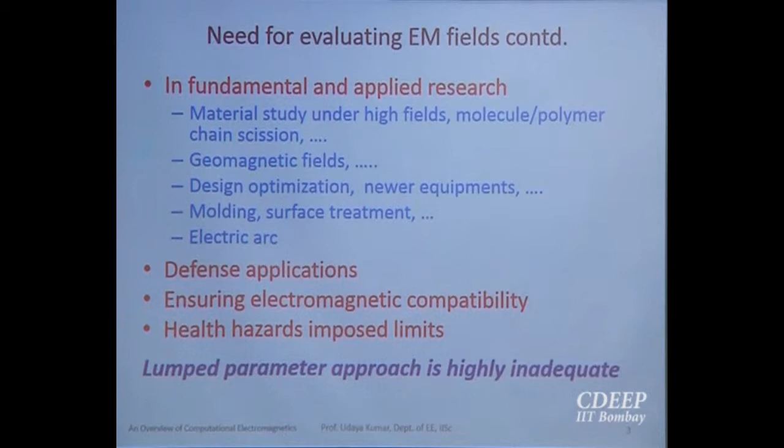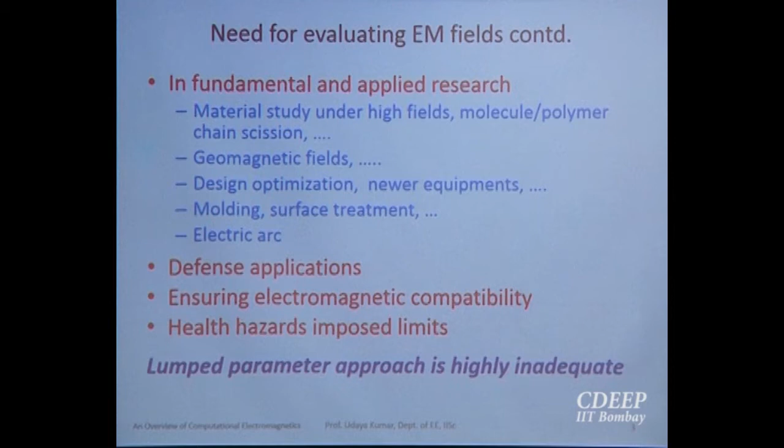Then all of a sudden we had a new paradigm called electromagnetic compatibility. So too many electromagnetic devices used in an environment started talking to each other, like students talking in class, not listening to the lecture. So suddenly people realized it's not permissible. We need to ensure all equipment are electromagnetically compatible. Neither should they produce intolerable noise, nor should they be susceptible to it. So this new paradigm is very important even for classical electrical engineering.

Initially it was thought to be a subject for high frequency people, but not really so. Now everybody has to worry about this. Then everybody has become health conscious.

They are very conscious about their health, even though they don't do regular exercise. They eat junk food, but when it comes to application, they say no transmission line should pass through my house. No antenna either. Everybody wants to use mobile phones, but they don't want an antenna nearby. That's true, but the thing is, health hazard is not that severe, but sometimes highly magnified because people think that's a very fascinating field. But we do need to worry about this.

All this application was there earlier also, before the advent of new computers. However, people were very wise then. They knew how to make good approximations. They knew how to use available techniques, lumped equivalent circuits, and so on and so forth. So intelligence was dominating over the method for quantification. So they survived. We survived with the lumped parameter approach.

However, now everything has to become very smart, very light, very efficient, so on and so forth. So we need to do a high degree of quantification. Otherwise, machines were there, radar was there well before the advent of digital computers. Anyway, coming back now, it's also not required because we are going to numerical methods. I thought I should just pass through these remarks.

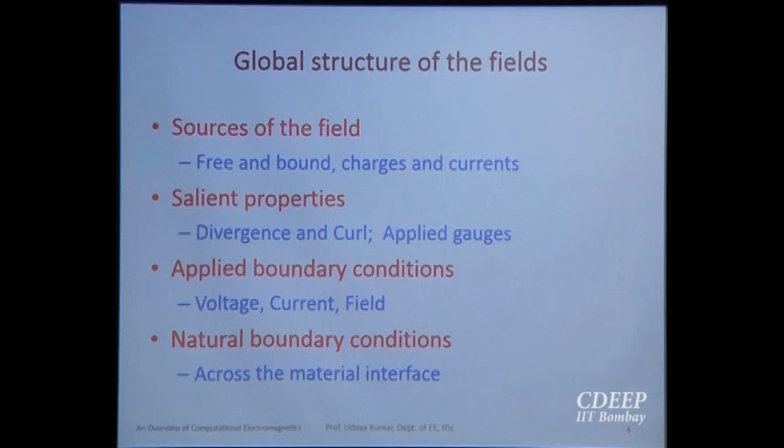These form the structure. Then comes the main point: because we are going to numerical methods, sometimes we try to tune it that way. Fields generally invade the space in and around, theoretically up to infinite extension. Basically, they are spatio-temporal functions. They are functions of x, y, z, or any other coordinate system you choose to analyze.

Then sometimes they are also functions of time. As a result, any function, by classical definition of function theory, has a domain and a range, both of which have infinite number of points. The domain has infinite points, and so does the range. For example, if field exists below a transmission line, in the x, y, z plane, you have infinite number of points, and every point has its own field value. So you have infinite number of values in the range. As a result, copying from the mechanical paradigm, we say it has infinite degrees of freedom.

This is a problem: it has infinite degrees of freedom. We are unable to comprehend the field directly. In addition, we have some coupling within the field, because for electromagnetic quasi-static, low frequency cases, people are very happy—charge is governed by voltage, magnetic field by current, and unlike in the high frequency range, they are independent. If voltage is there, charge is there. They are seriously dependent on the current passing through the conductor. Then we have current dependent on the load, which is not dependent on the charge on the surface of the conductor. But then slowly, when you go to eddy current problems, magnetic field and electric field start talking to each other.

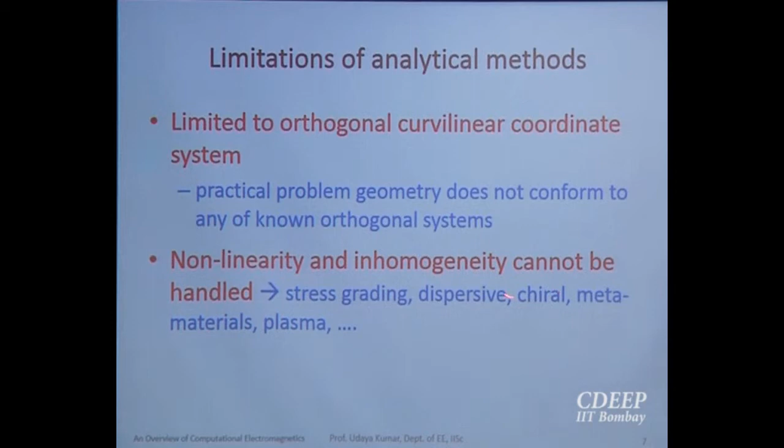We have movements involved, so one domain moves with respect to another domain, which is common in all rotating machines and actuators. Then coupling to thermal field, we have problems because we need to solve both equations simultaneously. Then we have flow problems, solar. This list is big, we'll stop at this point.

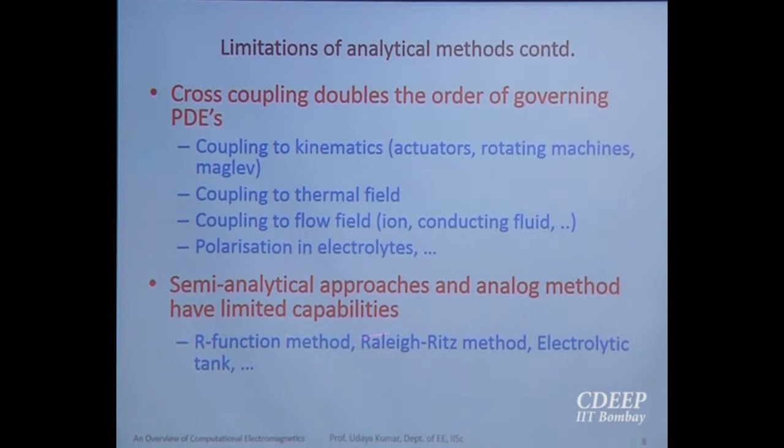So in other words, analytical methods are very attractive, very elegant, but have limited practical application. They are now limited to explaining simple cases in class, not beyond that. We have some semi-analytical methods, a first step towards numerical methods, but they also suffer from similar disadvantages.

Now comes the question: if we summarize, analytical method was very good and elegant, but has so many limitations. Then the question comes, why? How is it that numerical method becomes an attractive choice? What is so special about numerical methods that can tackle all these problems? So before praising the numerical method, first we'll look at the limitations, or the salient problems, in the numerical method.

Variables like geometry, parameters, material properties, and boundary conditions, which are available in parametric form in analytical solutions, do not appear in parametric form in the numerical method. One problem gives one number or set of numbers, not beyond. So any change in boundary condition, geometry, or materials requires us to redo the calculation again and again.

Then comes another important point: numerical solutions are generally not exact, except in some trivial examples. Many people raise their hand asking, if it's not exact, how can I use it? But exactness has little practical relevance. All our measurements, whether geometry, electrical parameters, or any other kind, have a tolerance or error. So exactness has no practical relevance; some tolerance is always there, so we have to live with that.

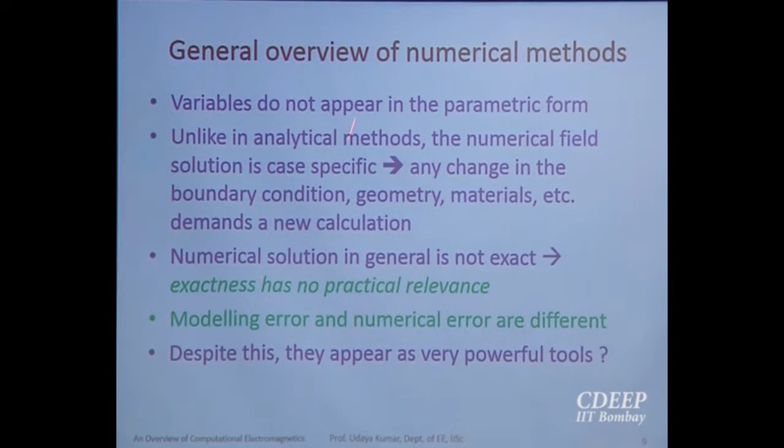Occasionally there is also an issue with error. Some errors are not numerical in nature; they are actually imbibed by correct, incorrect, or partially correct modeling. So modeling error and numerical error must be separated out. I'm using different colors to show that sometimes people club the modeling error with the numerical error, but it's not so. In spite of all these limitations, how is it that numerical methods are so powerful?

To illustrate that, we shall go into two well-known examples, an attempt to show that numerical methods are relatively easy to handle for day-to-day application. Let us consider a simple concentric cable, inner conductor, outer conductor, a highly simplified thing. Then these are color pictures of equipotentials, don't worry about them.

If you really see now, we know that the electric potential does not vary with Z. If you fix Z into the board, then theta does not vary either, so it's a function of only the R coordinate. So potential as a function of R is an analytical, continuous function, and therefore possesses infinite degrees of freedom.

Even though you know how to solve this, in general it has infinite degrees of freedom, which is difficult to solve. On the other hand, since we have an inability to imagine something abstract, we always want to imagine it in terms of known things. So we shall imagine a set of capacitors formed between the equipotentials. Of course, right now the equipotentials are known to me, otherwise you could do this approximation differently. So we have set up fictitious capacitors.

Now if you give this problem, most engineering students will definitely solve it, because they know how to solve these capacitors in series, whether they are equal or unequal is not a question; they have the methodology because they have been taught to solve it. What is the specialty of this problem? The number of unknowns is finite, because we have a finite number of nodes, and those voltages form the unknowns.

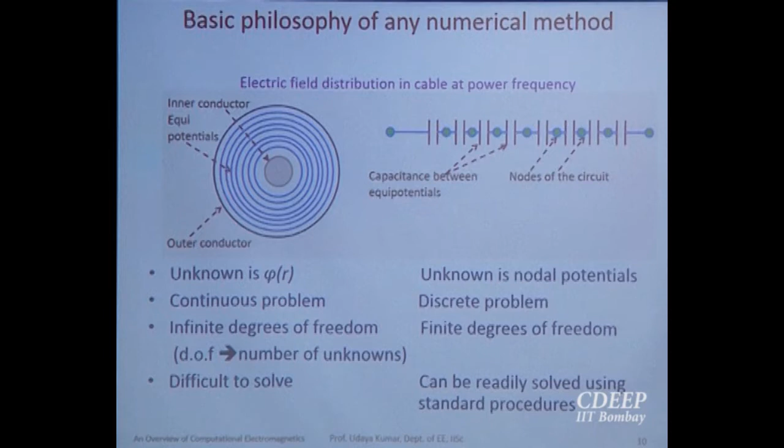So here we have a problem where the unknown is a function of space which has infinite degrees of freedom, whereas here we have an approximate problem where the number of unknowns is finite. This one we have been trying to solve, this one we are not so well versed in handling. So this is a difference: one kind of problem with infinite degrees of freedom, another with finite degrees of freedom, where we are more familiar. A second example of this kind, copied from a mechanical engineering book.

You have the famous hanging rope problem. A continuous rope takes a pattern of catenary, minimal potential energy under the constraint that the two ends are held at those two points. Instead of a continuous rope, you can have chain links, as used in survey, made of straight segments with a flexible joint with two degrees of freedom. The link can move around the joint. If you hang a chain of this kind, it also assumes more or less the same shape as the original rope. It's not exactly the shape of the rope, but almost the same.

Now comes the difference between these two problems. A continuous rope takes the shape of a catenary, which is a function of space - if we take this as x, it's a function of space. So because it's a function, it has an infinite number of unknowns, or infinite degrees of freedom. On the other hand, if you take the second problem, which closely resembles the first one, here the number of unknowns is finite.

How is that possible? If you know the position of these joints or links, we will have the solution everywhere, because once you know this position, between these two positions it's a straight line. So in the second problem, the actual number of unknowns is y1 to y6, finite in number, whereas in the original problem it is y of x, a continuous function. So see the difference now. Once again you can seek the minimal energy under the constraint to solve this shape. What I am trying to highlight with these two examples is that continuous problems we are not well versed in handling, whereas discrete problems with a finite number of unknowns, we are able to handle.

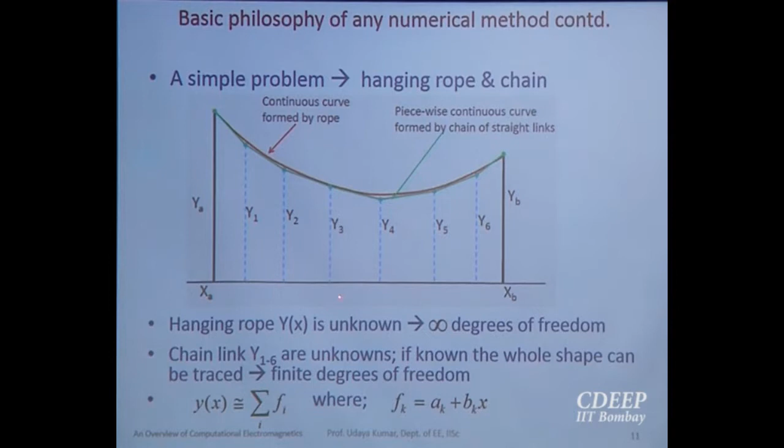So now comes the crux of all numerical methods. Field variables and their sources are continuous functions of space and time. Now we invoke a process called discretization, where an approximation is sought for a continuous problem, such that in the limiting case, when you increase the amount of discretization, this will tend to the original problem. There is some theorem to show that convergence does indeed hold. Discretization is the process where we make an attempt to approximate a continuous problem to a discrete problem in a consistent manner. All numerical methods invariably invoke this principle of discretization, as a result of which the number of unknowns becomes finite, and we are able to handle it using various techniques.

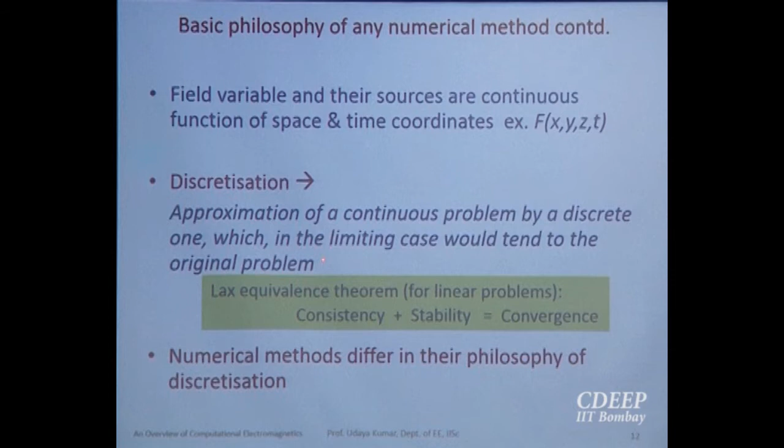Now coming to this concept of discretization, there are two main categories here: domain based methods and boundary based methods. In domain based methods, the governing equation is approximated, or an attempt is made to approximate the governing equation. We shall see them in some detail, not full detail. When trying to approximate the governing equation, what is its domain? It is defined over the whole of the problem domain, therefore your approximation is done over the whole of the problem domain. And remember, the governing equation actually applies to each and every point in the domain, therefore your approximation will be highly localized.

You can see later that such approximation is easy to code in a computer, because your approximation is localized, it's easy to handle nonlinearity and inhomogeneity. We shall see these two consequences later. This category has many methods: finite difference, finite element, finite volume, and so on - we will name them later. On the other hand, people liking Coulomb's law, Ampere's law and other basic laws thought they should always deal with the source, because if you know the source, you know the field. That invoked the boundary based method.

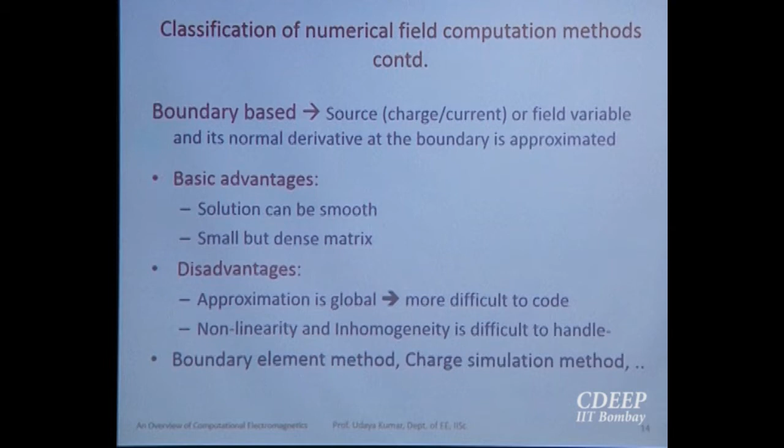Coulomb's law and Biot-Savart law are designed for a hypothetical case of single linear homogeneous isotropic media occupying the whole universe. This is not practical, so then they invoked polarization, equivalence of polarization with equivalent volume and surface sources, and then went into this boundary based method.

Basically the philosophy is very simple. The unknowns are the field as well as many times the source, because when you apply voltage, we know only the voltage, not the charge distribution of the conductor. So if you can somehow approximate the charge distribution, we will know the field.

Likewise, in the boundary based method, we try to make an approximation to the unknown source distribution, whether charge or current. The advantage is that your approximation is limited to the boundary, because we have source only at the boundary most of the times. So your solution will be smooth, because you are using basic sources that satisfy the governing equation almost exactly.

We will see some of these methods, but before going further, there are also disadvantages, because we are doing a global approximation, and if you have non-linearity and inhomogeneity, it will be difficult to tackle. We have boundary element method, charge simulation method, method of moments applied to integral equations, and so on. We shall see them there.

This applies to high frequency also, but being a low frequency person most of the times, I will highlight this example: people working with rotating machines wanted rotation to be imbibed. We had non-linearity on one side, because iron is non-linear, and at the same time we wanted rotation. Most of the times energy conversion occurs in the air gap, which in an induction motor is measured in fraction of mm, so when things move, it is difficult to discretize and handle.

They thought they should imbibe the good properties of domain based method as well as boundary based method, so they invoked a mixed method, where for non-linear iron they use the domain based method, and for the boundary they use the boundary based method, such that the air gap need not be discretized, so movement can be artificially plugged in.

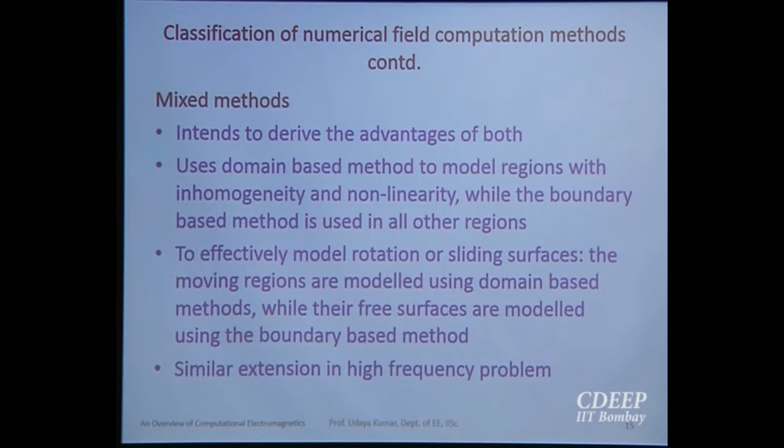But anyway, today's discussion is not important, I'll just skip this now.

Now we shall go a little more into the methodology. The goal is not to go into the details, because that will be covered mostly in other lectures, especially finite element which will be covered in subsequent lectures. Here the goal is only to give the general philosophy and superficial knowledge, and perhaps list out some advantages and disadvantages. At the same time, there are some methods hidden to insulation people that I also want to bring upfront, because they have similar principles of formulation.

So in non-wave propagation, we have static, electrostatic, magnetostatic and Eddy current problems. For people from the physical mathematics background, they may like to call this elliptic problem and parabolic problem, and there's no objection to that. We have several methods: finite difference method, finite element method, boundary element method, charge simulation method, finite volume method, and so on.

At least a few of them, because I had to cross them during my work, I will show some results. And the list is not complete, please note, because there are several things which are normally not used, several things which we never discuss in the engineering literature, but are available in the allied literature likewise.

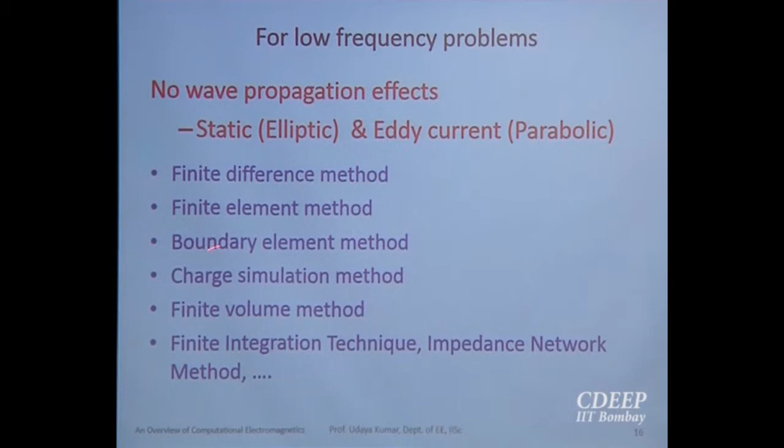Finite element method will be covered in a subsequent lecture, so I will not delve into that in detail, but I will make some highlights there. Boundary element method is a general paradigm. Sometimes all these methods, the charge simulation method and the method of moments, can also be combined here, so I will not highlight this method separately.

Then we have wave propagation problems. Most of the times when you say electromagnetics now, it is mostly meant that we are dealing with high frequency, but remember, low frequency also requires a lot of electromagnetism. Here you have the finite difference time domain method, a very elegant method, which is an extension of the finite difference scheme, but it has got physical insight to the curl operation. Then we have finite element method, because packages are available, they wanted to extend it to wave propagation problems, but it's not really that famous.

We have method of moments. Method of moments actually combines both the domain and boundary based method. However, invariably it is now quoted with the boundary based method.

Then you have partial element equivalent circuit method, PEEC, because people like circuit theory all the time. They wanted to represent everything in terms of circuit theory for two reasons. One is they like it and they can get some insight. Secondly, there are circuit solvers which can solve the matrix.

Then you have got more things, fast multipole expansion method, which can do far field approximation, near field approximation. You also have finite volume method. Incidentally, I did not go through it.

There's a PPT presentation from a professor from Aeronautics Department of IIT Bombay, which describes finite volume method for high frequency electromagnetics. I don't remember anything beyond this. It was there. I did not download, but I saw the name.

Anyway, then we have transmission line method, which is another kind of extension from the equivalent circuit method. Then I have so many other things like pseudo spectral time domain and multi-resolution time domain, and so forth. There are some methods borrowed from optics, which I have no real expertise or knowledge of.

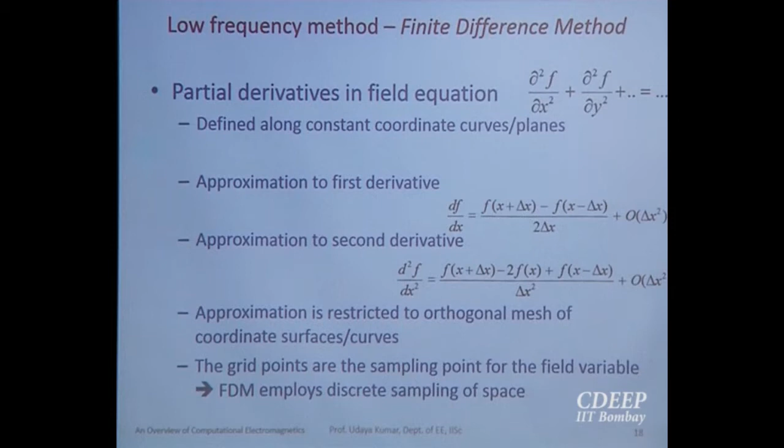In other words, you are trying to sample the continuous x by a discrete set of x values. As a result, when we do this operation on individual planes, you are trying to sample this 3-dimensional or 2-dimensional space by discrete samples. So FDM comes from this principle of discretization, where continuous space is sampled at a discrete number of points, resulting in an equation which is completely discrete in nature.

In the source free region, the potential at the center of a sphere is the average of the potential on the surface of the sphere. This is a consequence of the 1 by r dependency, 1 by r square dependency. So this is built in here in a discrete version.

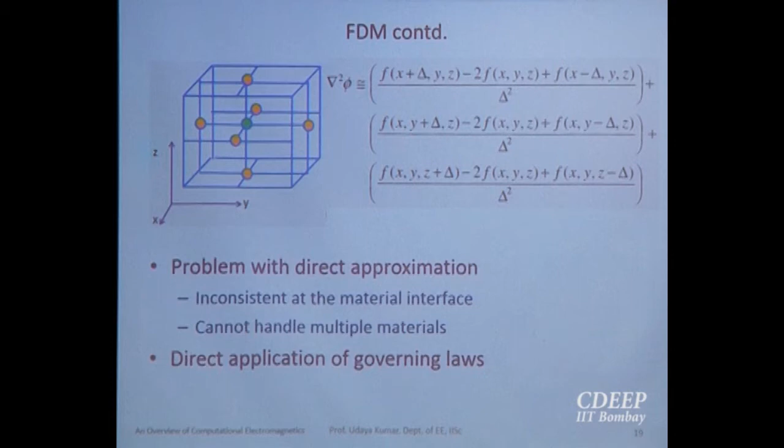So this is well known, especially for giving assignments to students because they can formulate it with ease. So this could be one of the first steps or first methods we can teach and what we can expect from students. However, let's not be taken away by this approximation, because occasionally, even in research papers, they make this mistake of inconsistent approximation.

The finite difference scheme in the classical approach cannot model an interface, because at the interface the field is discontinuous and your approximation is not valid. We will not go into details now, but if required we shall see later. So if you have only one material, you can proceed directly.

If you have multiple materials, you need to take care. Instead of doing this directly, we know that governing laws are the basis for the differential equation. In the Laplace electrostatic field, we imbibe two basic laws: one is conservativeness, one is Gauss law. Conservativeness can be directly satisfied by defining grid points, so therefore we need to impose Gauss law. If you have multiple materials, you can impose Gauss law and get a consistent form of the FDM equation.

There are some intricacies required to handle the boundary and all that. I think today's discussion may not be appropriate to go ahead with that.

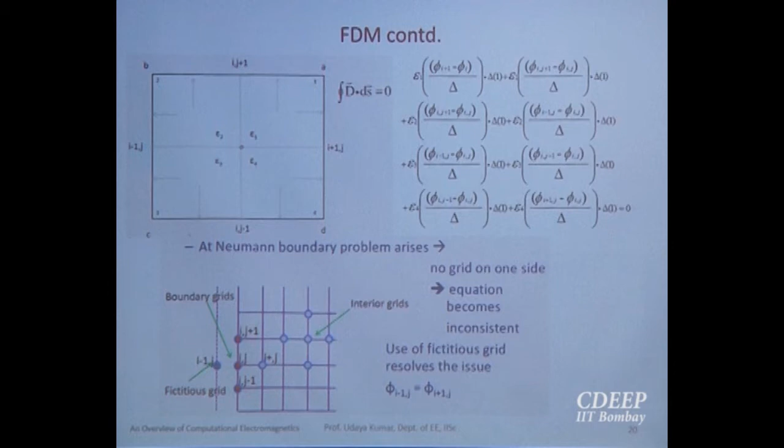Incidentally, there's another issue in some presentations made by people who use numerical methods. When you select a cylindrical coordinate system, the minimum value for R is 0. You cannot show results on the left side. Some people do it, which is very strange, because in a cylindrical coordinate system you either show the whole 3-dimensional picture or a 2-dimensional picture which starts from R equal to 0 only. You cannot go beyond it.

We have got cables now, especially HVDC cables. These cables have XLPE insulation because it's easy to extrude and has good dielectric properties. Unfortunately, DC insulation is a problematic case.

Many times, even in big organizations, DC is taken for granted. It's not really so, because in the case of DC insulation, after a few minutes to a few hours, the field will change from dielectric to conduction field.

During this process, there is a problem, because except for porcelain, glass and some well-known materials, polymers and many such materials have a nonlinearity property, where conductivity is a function of electric field as well as temperature. It's not a simple function, but an exponential function of temperature and electric field. So sigma becomes a function of field, and field is a function of space.

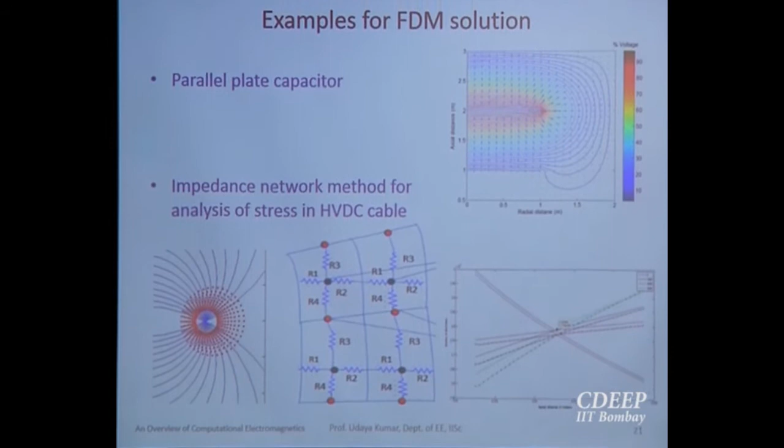Now we shall quickly summarize the advantages and disadvantages of FDM. It is very simple to code, in the sense that if you know how to write basic functions and organize variables, it is simple to code and easy to understand and evaluate error bounds. There is a lot of literature which gives you the error bounds, minimum amount of calculation, and to some extent non-linearity and inhomogeneity can be handled.

But the basic disadvantage comes with the orthogonal grid. We need an orthogonal grid to do direct FDM approximation. However, if you use the integral approximation, you may partly overcome this problem. But in the classical sense, yes, we need an orthogonal grid.

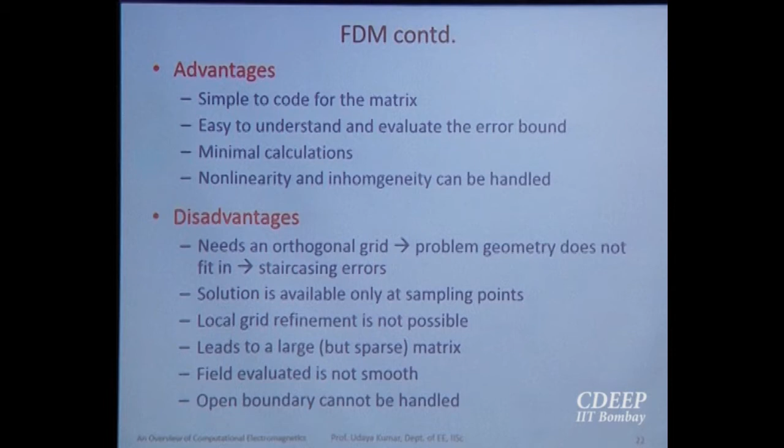And when a problem has a smooth boundary which does not conform with the coordinate system we have employed, we need staircasing. In other words, imagine a Cartesian grid where we are trying to model a concentric cable problem. Obviously, grid lines are straight and boundaries are curved, so you need to do a staircasing approximation. This is also a serious problem.

Then, the solution is available only at sampling points. This is one of the basic problems in FDM. The method does not tell you how to interpolate or extrapolate. You may do it on your own, but the method in principle does not speak about any of these things.

Then, local grid refinement is not possible, one of the biggest headaches here. It leads to a large matrix, but a very sparse one. Field evaluation is not smooth, especially in some applications where the field is important. This is a very critical point.

Then there's the open boundary issue. In electrostatics we don't have open boundary, we have only open geometry problems. However, in literature you see this terminology used, violating the mathematical principle, which is called open boundary. So we shall continue to use that terminology. Open boundary cannot be directly handled, so we have to bring in methodology from FEM to handle that.

So now, in the first section, we just went through FDM. Let's have a little more detail and summarize the advantages and disadvantages.

Now we shall go to the next one, a very famous friend of ours, the finite element method, again borrowed from our civil and structural friends. Here the philosophy is slightly more elegant than the finite difference scheme. I will not go through details, but some points need to be highlighted because most of the industry uses FEM rather than any other methodology. Even though there are commercial packages, engineering design involves electrical, thermal, and mechanical aspects, so it is a common platform for all three disciplines, therefore FEM is still the leader in this domain.

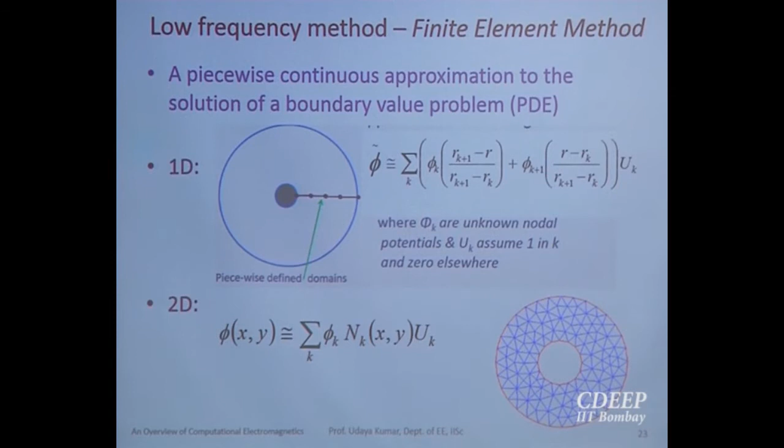So likewise, if this approximation is carried out, this is only an introduction, not the detail. So what is the thing now? Because you have made an approximation to the unknown function, which is called the potential here, the original differential equation cannot be employed. The original differential equation is a Laplace equation, in this case, or Poisson's equation, which requires the second derivative to be definable. That means the first derivative must be continuous, otherwise we cannot define the second derivative. So because we made an approximation, the PDE cannot be employed as we can have lots of discontinuities.

So then people said we get a weak solution. However, we project to a domain whose dimensions are much lower than the original dimension. So in the weak solution, we get the solution, however it may not satisfy all the differentiability and continuity requirements. So here we have two distinct approaches.

A very elegant approach, in my opinion, is variational calculus. We will not discuss that, but it's a very beautiful one, developed along with differential calculus by the same set of people, Newton and others. But we have lost touch with this because it's slightly more difficult to understand, as we've never had training in it. However, if somebody is interested in learning, you know that the distance between two points is a straight line, but can you prove that using your differential calculus?

Distance between two points, you know. I'm not talking geodesics, I'm talking about a plane surface. It's a straight line, everybody knows, we can show it geometrically, but can you prove it using differential calculus? Such formulations are straightforward in variational calculus.

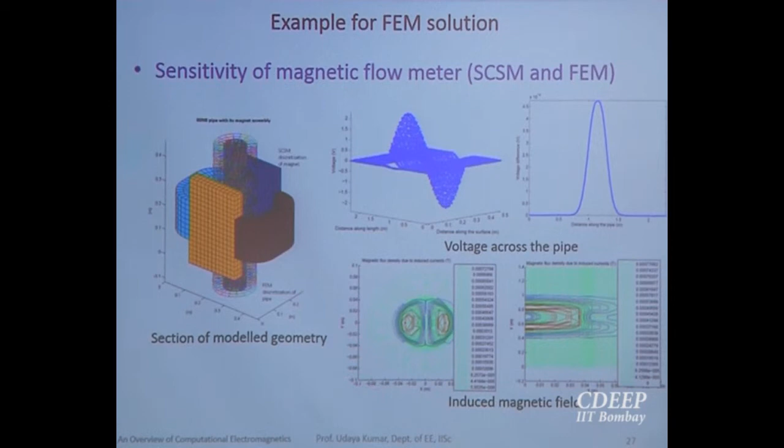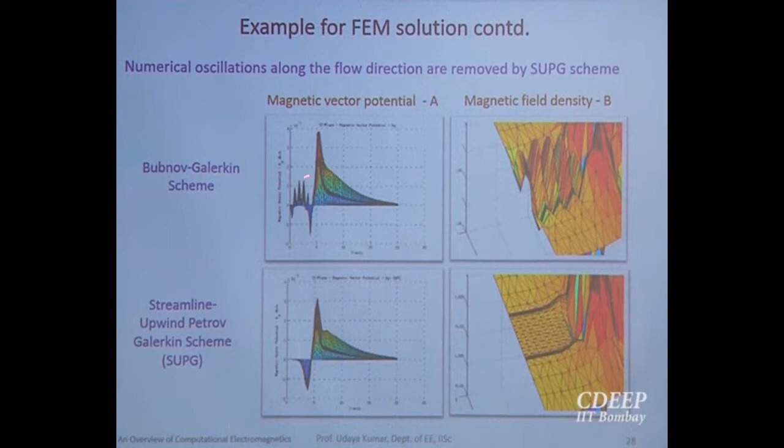And as I told you, flow rate is nominal. For the present flow rate employed in India, this is sufficient. In case you go for a huge production, a huge reactor, then we will have a large magnetic Reynolds number, in which this Galerkin scheme can lead to oscillatory solution, for which streamline upwinding scheme can remove the oscillation. Those details are not essential today.

Now we'll go to the next one. Summarizing, finite element method is still a dominant method because it is used in our allied branches, civil and mechanical. Engineering design involves a combination of all the three disciplines, so therefore finite element method will still dominate the industry in most of the application.

It has been developed to such an extent that it can handle even the open geometry problems or open boundary problems. Earlier ballooning technique was employed, now we have a special element called infinite elements to model the open geometry. Then it also has different forms in the form of meshless formulation, so on and so forth. So in other words, FEM is one of the important numerical methods for electrical engineering.

So next method will be the finite volume method, which is not that famous in electrical engineering. Some people take it to be the extension of finite difference scheme. Basically, it is not something new. What is done here is basic conservation laws are directly applied.

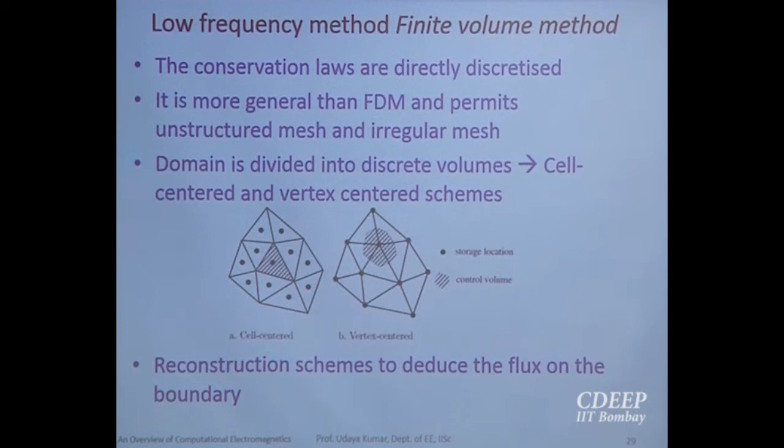For example, in a discretization scheme like this, you need to employ Gauss law or the divergence law directly. So that gives you the formulation. I'll not go to the details, but this is an interesting methodology because it's easy to understand, easy to formulate, and sometimes not always easy to code.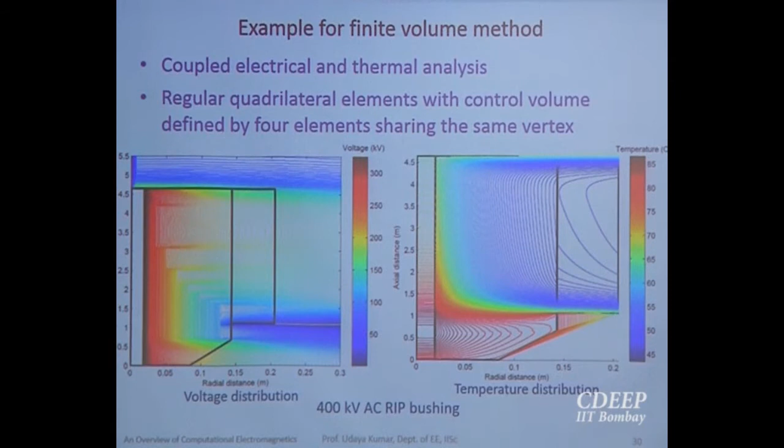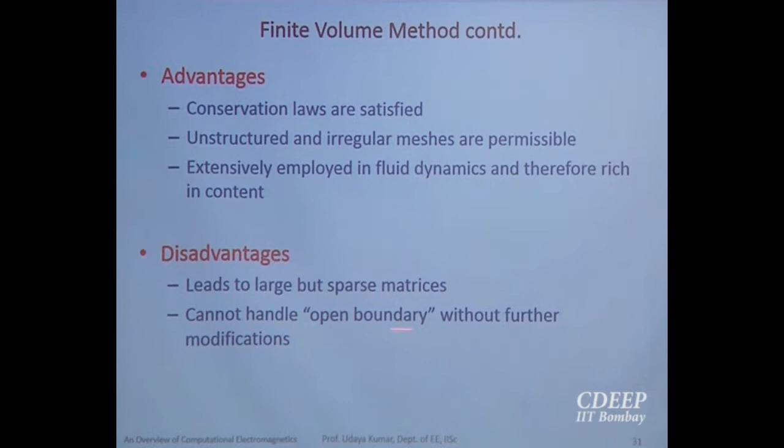Now I think I have listed out the advantages and disadvantages, but basically because it is a domain based method, it is not designed to handle open boundary. We need to do some further modification. It leads to large and sparse matrices.

Now we'll go to some unconventional methodologies where actually method of moment is brought into classical insulation application. These applications are not readily seen by people working in magnetics because they are not that useful in handling non-linear materials, but nevertheless they are useful in many senses. So I will quickly go through this because it can give the basis for method of moment for higher frequencies.

As we know, basically free and bound charges produce electrostatic field. Free and bound currents give rise to magnetostatic field. Here bound means that arising out of polarization of the material. Now there is a theorem in electrostatics as well as magnetostatics that the effect of polarization can be translated into effective surface and volume charges depending on the inhomogeneity.

And once you know that, we can apply Coulomb's law and evaluate. Basically, in the electrostatic problem, the charge distribution of the conductor is not known. If I make an approximation to the charge distribution, then I can evaluate the field in terms of the coefficient of the charge distribution. I will avoid the details here.

So now, unfortunately, like any method of moments, it involves complicated coordinate system transformation, numerical integration, handling singularity, because on the surface you are trying to evaluate the potential. Analytically, surface charge density has potential and electric field which is free of singularity. But when you do it numerically, because you are trying to approximate Riemann integration, singularity comes into picture. We need to do some circus for handling that.

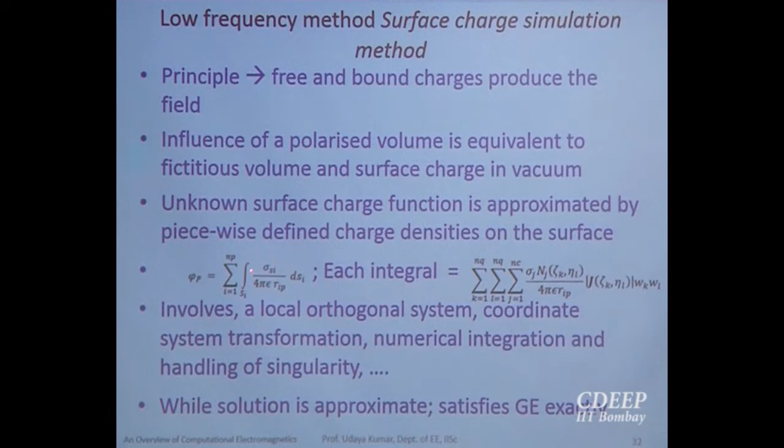But the advantage is you are trying to approximate for the unknown source, as a result of which your solution will satisfy the governing equation exactly.

This is a typical 400 kV corona ring. The interest was not the corona ring because these are readily available. What level of surface abrasion or protrusion can be tolerated so that in spite of presence of such protrusion, corona will not appear in the system. That was the aim of this study.

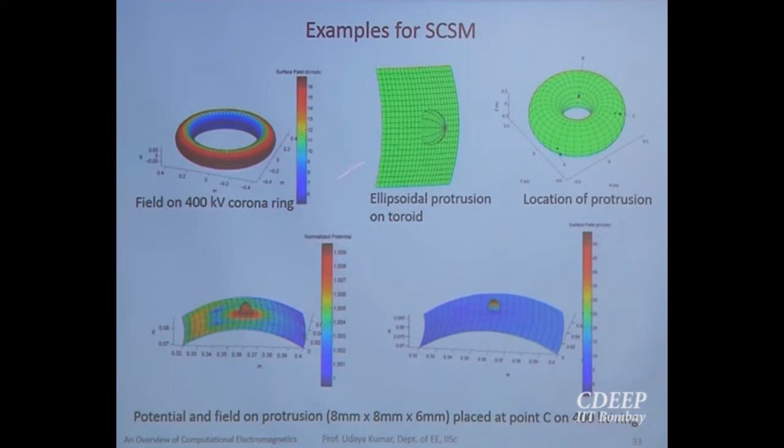So this was done, and micro and millimeter scale protrusions are invoked and the field was evaluated. This is one of the useful methods for electrostatics.

And the next, of course, this is another counterpart of the surface charge simulation method, where the potential distribution along the string insulator is evaluated. But I am coming to the magnetic problem.

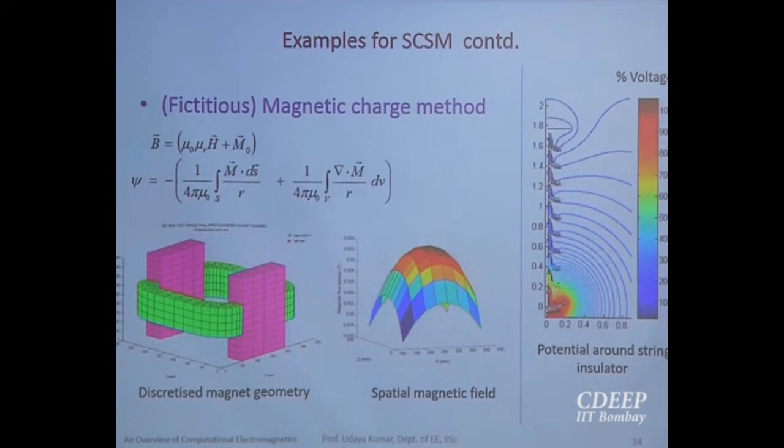Surface charge simulation method can be invoked in magnetostatics by invoking fictitious magnetic charges. So you have iron pole, and you have got permanent magnet, permanent magnet. These are the pole shoes made of soft iron, and invoking again the similar principle, we are able to compute the field. So these are something useful.

To handle non-linearity, we need to now invoke the volume charge, fictitious magnetic volume charge distribution.

Another example of surface charge simulation method comes from the grounding problem in Karnataka, maybe in other parts of South India, I don't know. Of course, availability of land for substation has become very difficult. Land is very expensive, many people don't want to have a substation next to their doorstep. Second thing is, now government gives you land which is not flat. Substation runs for 200-300 meters depending on the voltage level or more.

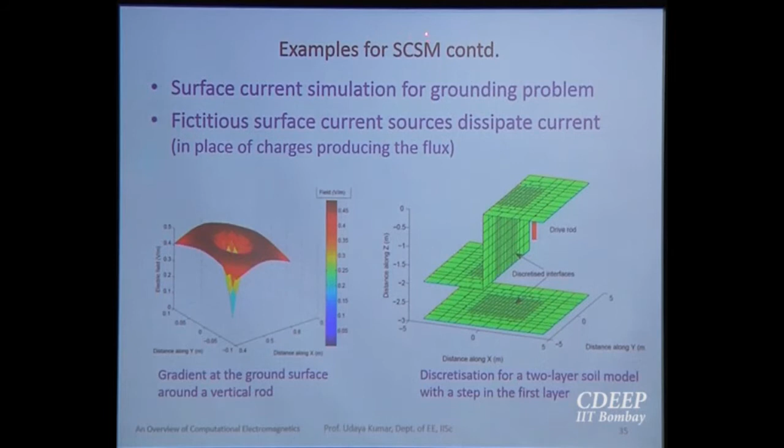In such cases, it has been found that working on the land to make it flat is very uneconomical for several reasons. So what they are doing is, each bay of substation is at a different ground level. In such cases, what will be the performance of the grounding system? So in the analysis, some code was written. Again, it uses surface current simulation method. The current is fictitious over there.

So this has got these advantages, and what I have listed here can be extended to higher frequencies also. What is the advantage of this method? It involves only boundary discretization. It can handle open boundary because the domain never comes into the discretization. It's very accurate, and small abrasion surfaces can be handled. Mesh refinement is possible.

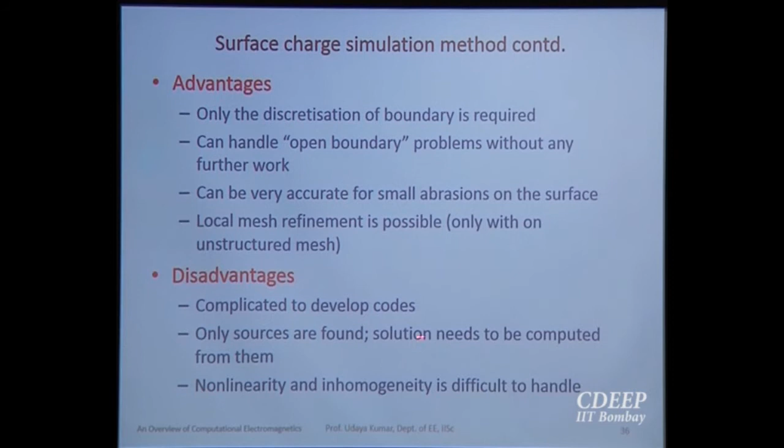However, it has got its own limitation that codes are difficult to write, especially if you are looking for micro irregularities. Then only sources are found. All the boundary based methods compute the source, so then the solution you have to compute on your own. Non-linearity and inhomogeneity is difficult to handle.

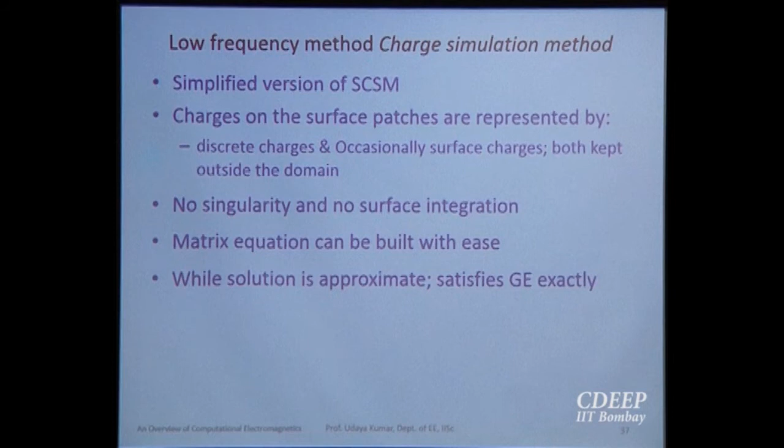We'll quickly go through an alternative of this because many people may not be interested. In the previous case, surface charges are approximated, but because of this we have a problem of doing surface integration and handling singularity. On the other hand, if I can combine all of these surface charges with discrete charges and keep them just inside the boundary, then we can overcome all the difficulties.

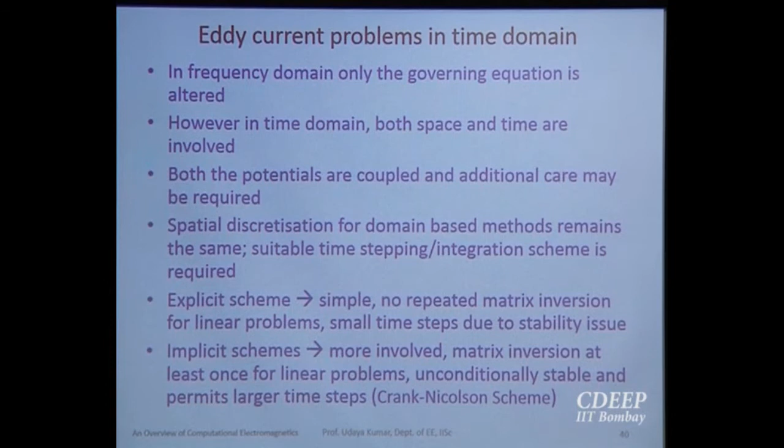Now, so those two are mostly static problems. In eddy current problems, I think we'll discuss in the next presentation. So what I thought was, we'll just go through only one slide on eddy current problems. In eddy current problems, we can have frequency domain or time domain, as you know. Only problem comes because time enters as a variable in the case of the time domain version. So then many of the methods can be employed there, where spatial discretization still remains the same. Only thing is suitable time discretization or time stepping is required.

Most of the time, this time stepping is done through either explicit or implicit schemes, where the explicit scheme has the beauty that every time updating can be done without matrix inversion, unless you have a non-linearity in the system. Whereas in the implicit scheme, there is no numerical instability; however, matrix inversion may be required at least once.

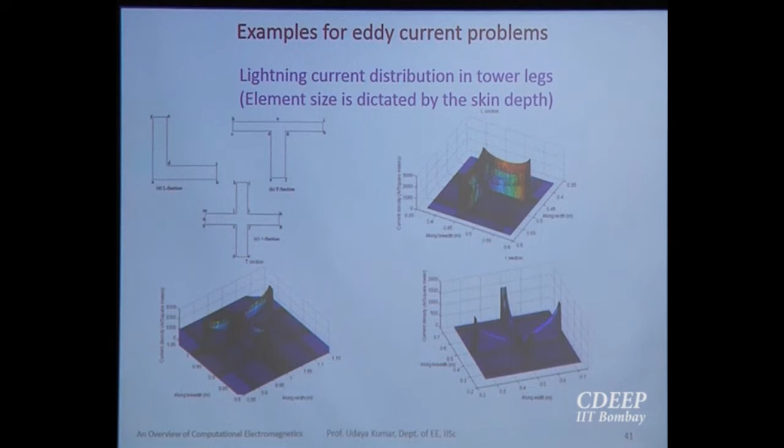This is an example looking into the current distribution through tower legs. Tower legs, you have L section, T section, plus section, depending on the cross section. So here the current distribution was computed using the in-house eddy current solution.

We shall summarize the low frequency methods before going to high frequency methods. There are several well-known methods. Selection of method must be based on the properties of the problem, whether it is an open geometry problem, whether it has inhomogeneity, whether it has non-linearity.

On the other hand, what is your target? Are you talking about the total energy, force, capacitance, inductance, or are you looking at a maximum field, peak loss density in a certain region? Depending on that, you can choose the method if you have a choice.

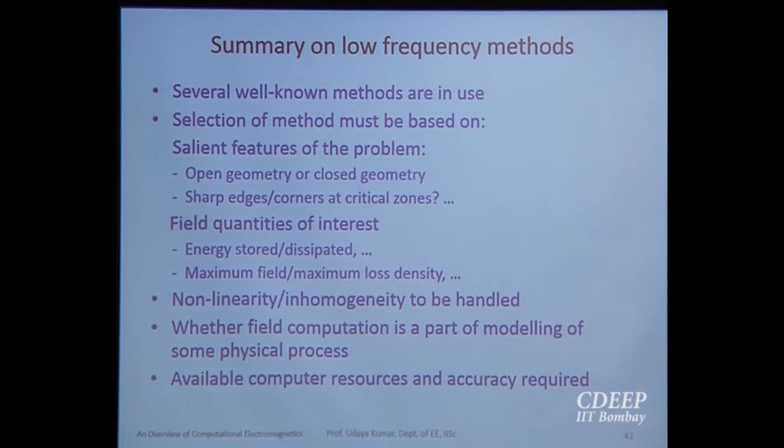Then, of course, it's important to check whether field computation is part of a physical modeling process, because field computation may be a main step in the design process. On the other hand, if you're doing research, it may be part of a model which involves modeling a physical process, so then we need to do the things repeatedly. Those issues must be discussed or analyzed before taking it to a problem.

Applications of frequency methods are very vivid, we know that. We'll skip this because of time. We'll go to high frequency methods and dwell into one or two high frequency methods before we conclude in this presentation.

Now, in the case of high frequency methods, we have got a frequency domain approach and a time domain approach. Most of the time, it is a proprietary term of your ECE people, electronic communication people, rather than classical electrical people. However, electrical people sometimes have to deal with that because they have got strange phenomena. We will mention about that. Now, the question is, here you can formulate in terms of potential and field, modified potentials, and so on and so forth.

Now, most of the time, in the high frequency method, we invoke what's called method of moments. Actually, the Galerkin approach is also a method of moments, even though we don't call it by that name. So anyway, in method of moments employed for high frequency, we can do approximation using domain-based methods or boundary-based methods. But what is the speciality here now?

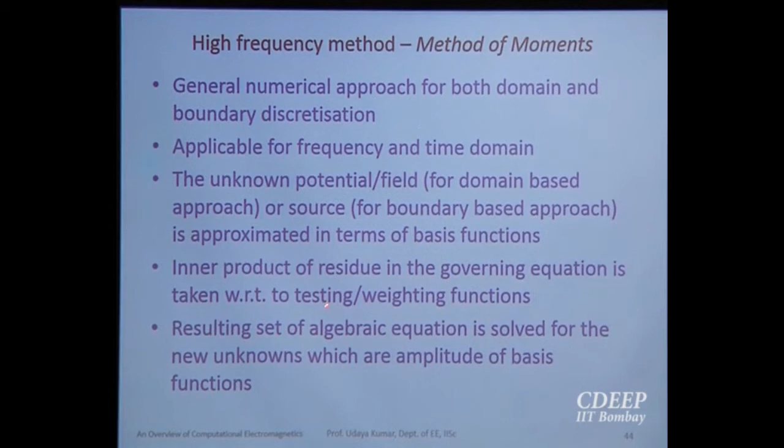I think this could be boring. I think I'll skip this, even though it's very interesting. I'll skip this and go to the next one, because too much abstract without any example would be difficult to follow.

Basically, what we do here is the following. In the case of method of moments, like your Galerkin finite element method, we do approximation. In this approximation, for the unknown source or unknown potential, we invoke what's called basis functions, and these basis functions define the order of the approximation. Then we use another function for sampling the residue or the error.

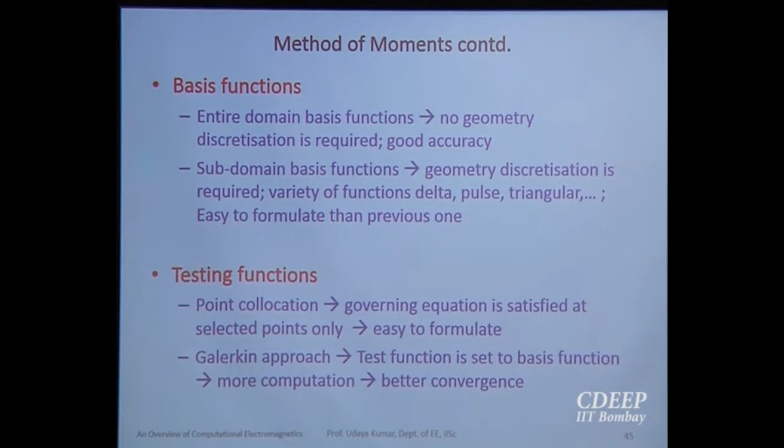I think I'll skip this also. Okay, we'll go to this example that may be slightly better off.

Let's look into the method of moments for thin wires. Thin wires are a bit famous in modeling because prior to surface modeling, thin wire modeling dominated evaluation of radar cross section, evaluation of interference, and so on and so forth.

Here the example is specifically for frequency domain because time domain versus frequency domain difference comes only with the time stepping. In all these problems, as I told, in high frequency a method of moments invariably means a boundary-based method. We invoke Green's function or the fundamental solution.

This is nothing special. We had point charge as a building block for electrostatic field. You have a dipole as a building block for the high frequency field. However, finding the fundamental solution of the Green's function for a particular problem can be a very cumbersome process because the problem is not having only one material - it has multiple conductors in and around. But other than that, this method goes through.

I'll avoid all these details. So what we try to do here is approximate the unknown current in the wire in terms of a simple pulse function or triangular function or a combination of polynomials, and then try to impose boundary conditions. Because once you make an approximation of the current, we can calculate the scattered field, but the field on the conductor inside the wire should vanish, or it should be equal to the impedance drop or resistive drop.

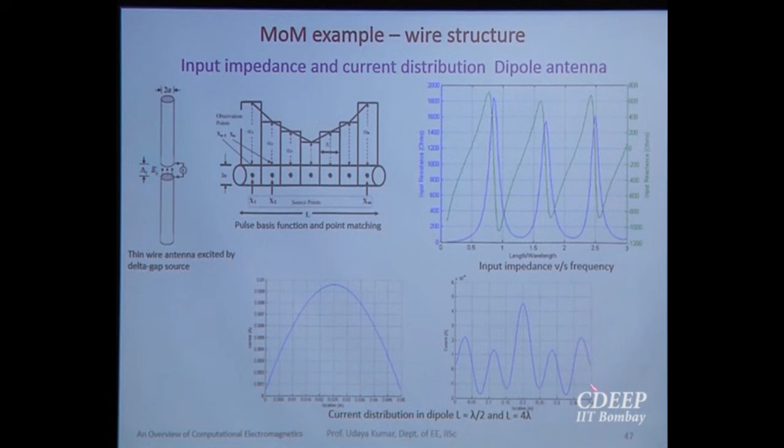So this is a quick example of an in-house code where the impedance of the dipole antenna is calculated. It involves very minimal steps. If you really want to try, it does not require any great mathematics. You can evaluate the impedance as well as current distribution.

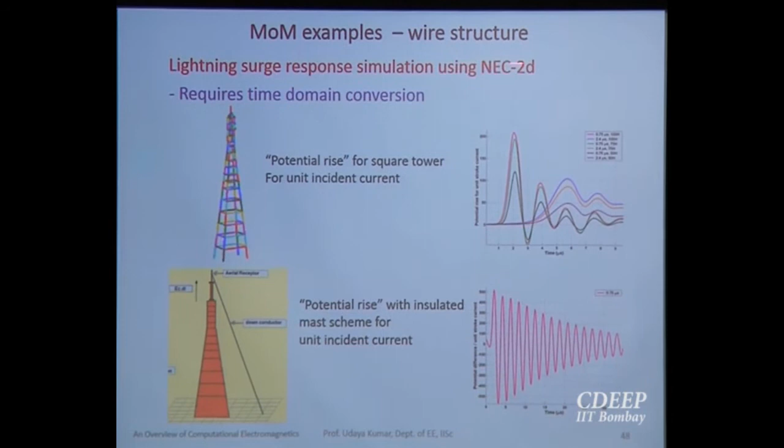Or else, if you are not ready to write code, you can use the numerical electromagnetics code which we employed for calculating the lightning surge response of the tower-like structure, insulated mast structure, and so on and so forth. Only problem in frequency domain to time domain is the conversion from frequency domain to time domain, which involves a lot of numerical problems.

We have a tower which launches an upward leader. All these events happen in a fraction of a millisecond. If we don't have the upward connecting leader, it is like a vertical monopole over a ground. So this strike to ground induces a current because it radiates electromagnetic field which links to the tower-like structure and causes a ringing within the tower.

On the other hand, if you have an upward leader, it is a non-linear electric arc which has a corona sheath surrounding it, spanning up to a few meters, which will dump in the charge, as a result of which the current changes from this form to this other form. So this was possible because the field computation was done in time domain using the thin wire code.

This principle is extended into conducting surfaces in the method of moments using most of the time what is called the RWG basis function - Rao and two other names I don't remember, obviously not Indian names anyway. This basis function is very famous, and it ensures continuity across the surface.

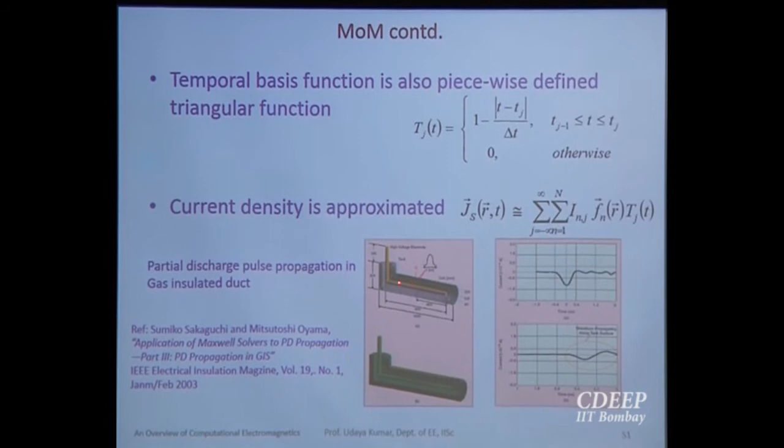Basic mode is TEM, then dielectric surface TE, and so on. Because this is a continuous duct where measurements are possible only at the couplers, some things are done in the electrical engineering also.

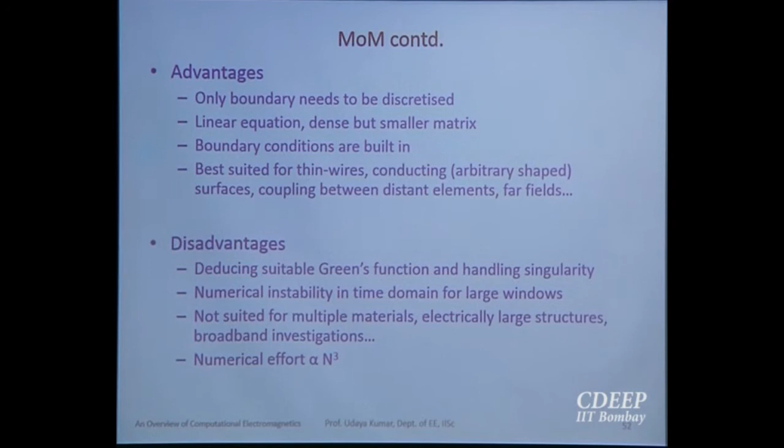I avoided all these things because I think that explanation would be boring. In the method of moments, basically we discretize the boundary.

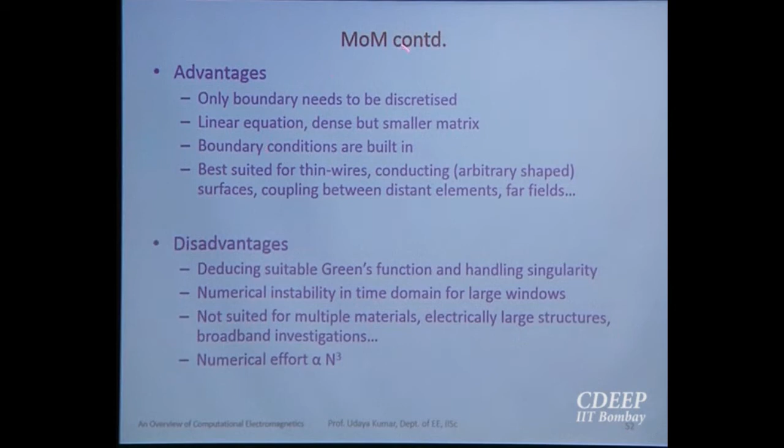We have a counterpart in electrostatics, magnetostatics, eddy current, and high frequency. But in high frequency, it is always mostly associated with the boundary discretization. The resulting equation is a simple algebraic equation, linear for linear material. It is a small matrix, very dense.

So in method of moments, because the boundary is discretized, boundary conditions most of the times are built in. This is best suited for linear systems. The disadvantage is that first of all, we need to have a Green's function.

We need to handle singularity, because the numerical version of the equation has a singularity. It's difficult to handle multiple materials, we need to do a lot of circuits. And numerical effort is proportional to the cube of the number of unknowns.

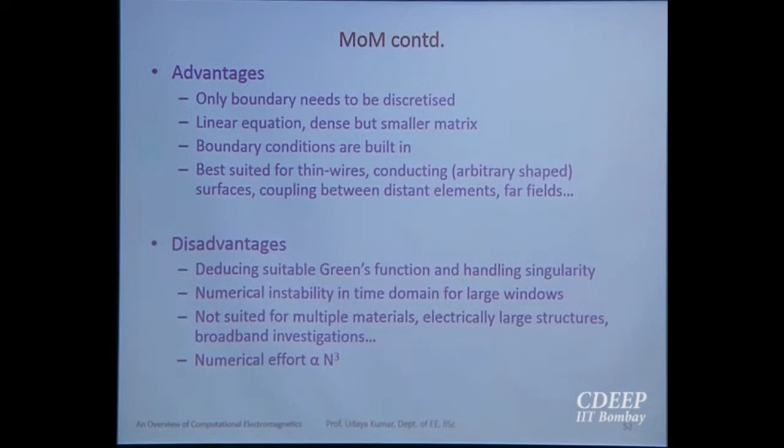We will quickly go through another one, the finite difference time domain method, because the previous method was difficult to understand. But this will be very straightforward to understand because it's a direct implication of curl laws both in space and time, called Yee's algorithm. Basically, we have coupled equations.

So instead of combining them, we'll handle them separately in this approach. This is an example in a Cartesian grid. You try to employ central difference for space and time using the leapfrog technique, for example.

If you see here, the magnetic field here is a result of the circulating electric field here. And because time is involved, this is leapfrogged in time by half a time step. In other words, the magnetic field at the center point, surrounded by 4 electrical sampling points, will be given by the components surrounding the curl of this electric field.

But please note, these are defined at time t, whereas the resulting magnetic field will have an increment of delta t by 2. This is, even though physically correct, a numerical forcing of propagation or time delay involved.

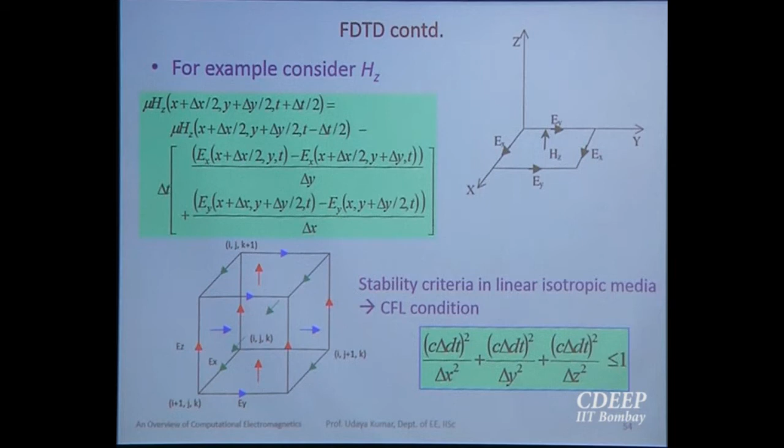This is very simple to understand and implement, with the Courant-Friedrichs-Lewy condition for stability. Because it's an explicit scheme, we cannot use large time steps, because the numerical domain of dependency should contain the domain of dependency of the differential equation. Otherwise, numerically it is an unstable system. So this has to be invoked.

So now why am I trying to advertise this method? Very simple to implement. However, we must not be taken away by the simplicity, because it can invoke numerical dispersion and anisotropy. This is very well known for people working with high frequency, because this dispersion is not from a physical phenomenon, it's from the numerical aspect because of discrete sampling.

So the remedy for this will be to have at least 10 cells per significant wavelength component. If you are working in the frequency domain, defining wavelength is not difficult. If you work in the time domain, you need to take a Fourier spectrum and decide which is your significant upper frequency, from which we can get the wavelength, and ensure that 10 cells are there for every significant wavelength.

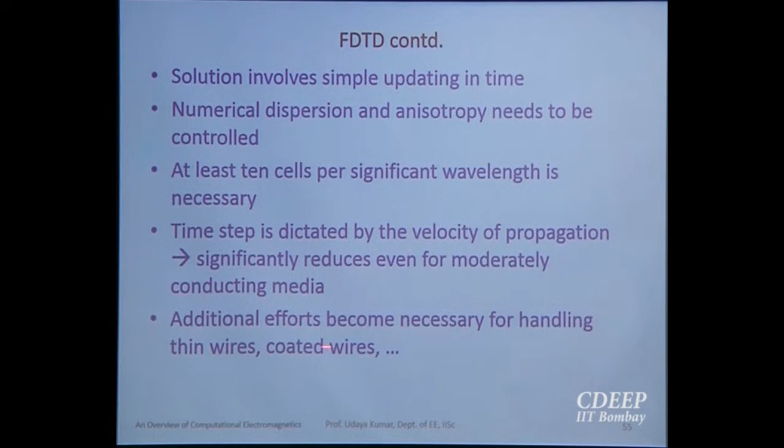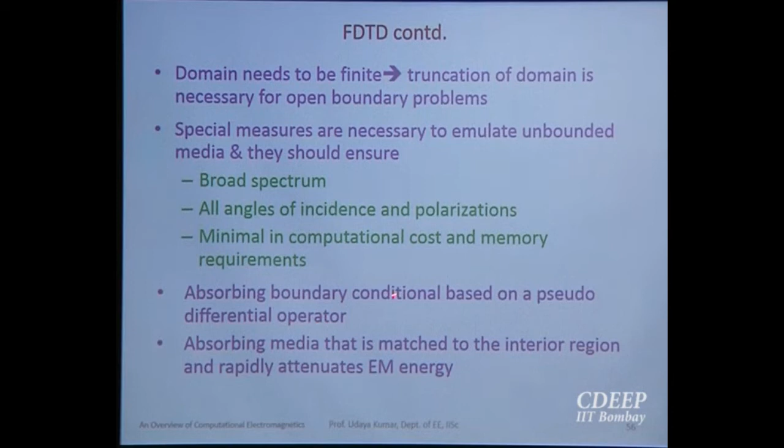And because it's a domain-based method, you have to discretize the whole domain. Because of this, when you have an open boundary problem, we need to truncate the domain because we cannot handle an infinite domain. So truncation can be done in several ways, by absorbing boundary conditions or higher order differential operators.

I will skip this also, and show a small example here. This is an old example of mine where, instead of talking about RCS or antenna power radiation, we have a channel, a lightning channel of 1 centimeter radius, 3 kilometers long.

Please note this is a very long one. So the whole space is discretized up to 9 kilometers. A perfectly matched layer is employed at the boundary, and our cell size will not permit handling a 1 centimeter radius conductor. Using a subcell or subgrid approach, it is possible to implement.

What is done is excitation is given. In most electrodynamics time domain calculations, you should avoid any signal which is rising fast. You should have a smooth rising signal.

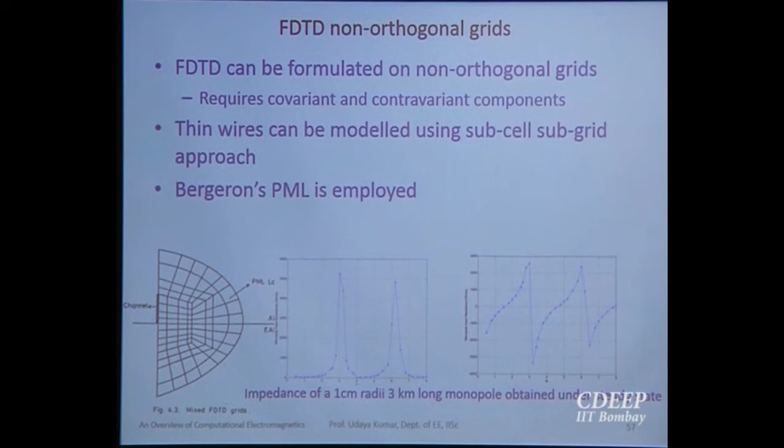So what I did was, using Gaussian rise sinusoidal excitation given at the ground end, wait up to steady state and compute the impedance for various frequencies. You can see theoretical and computed impedance match pretty well. So it shows the method is excellent. FDTD method can be very accurate.

Now to highlight the methodology, numerical effort is proportional to N, whereas an earlier method is N-squared. However, because the domain has to be discretized, N can be pretty large. When you have multiple materials, it's not a serious issue, but if the materials are not fitting into orthogonal planar interfaces, we have some problem. This method by itself is not suitable for far field approximation, or for interaction between two conducting or dielectric bodies separated by a large distance, nor for systems with high Q, and so on.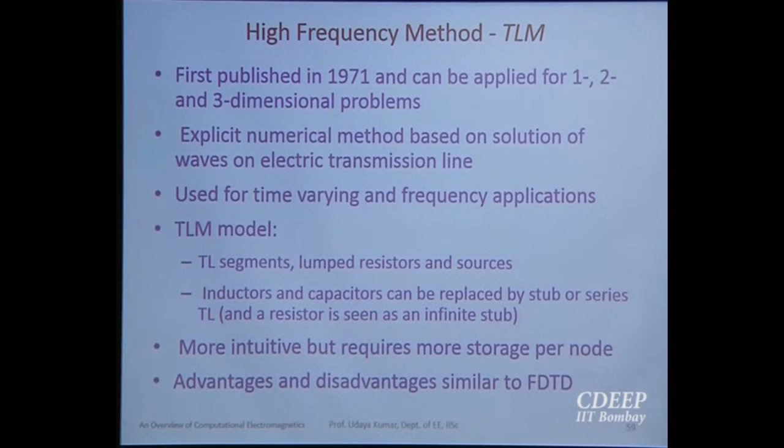In the high frequency method, there's one called the transmission line method. It is again a derivative of the impedance network method or partial element equivalent circuit method. This method basically imagines a skeleton of small transmission lines representing the original problem domain. So the field propagation in the original domain is now imagined in terms of signals propagating in the small transmission lines, which are interconnected. So it has a beauty that we can use a circuit solver for solving the field, provided we get the original matrix.

And there are two more issues. One is the finite element method. I think it will be covered in the second or third lecture today, so I will not deal with this one.

However, one thing I want to say is that compared to FDTD, compared to method of moments, FEM did not take over the high frequency domain. Even though commercial packages, because they have built-in routines, tend to propagate it, it's still not that famous because other methods have taken over for various reasons. But in principle, it is possible to use FEM, with the only modification required in time stepping - whether you want explicit or implicit time stepping. Advantages would be it can handle multiple materials and arbitrary shapes, whereas the disadvantage is the whole domain has to be discretized and we need to do a truncation of the boundary.

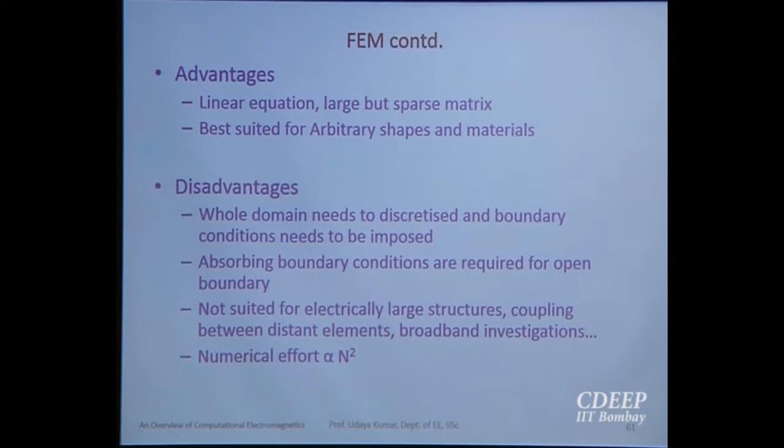Other issues are there. Now we'll quickly summarize our observations on high frequency methods. There are well established methods, so selection of method is again based on the salient feature of the problem, and whether we have non-linearity, inhomogeneity, or special materials like metamaterials present. Then you have to look into your methodology, and also into the computer resources available.

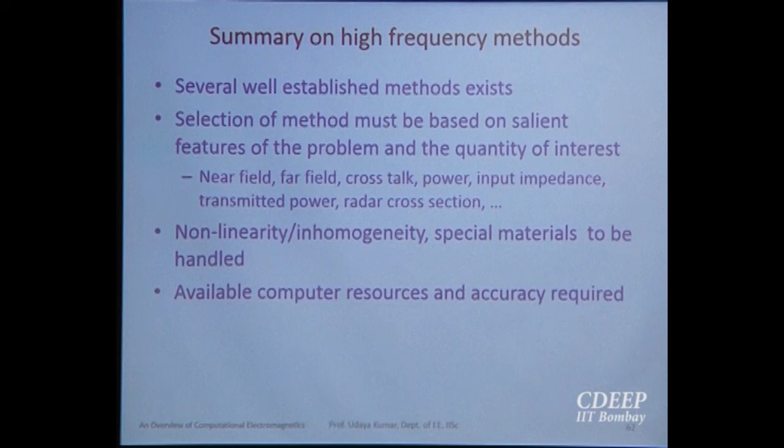Because if you remember, the reason for evolution of faster computers was not because of computer science people, it was because of the computational people - mechanical, civil and electrical people who demanded it. So computer people thought they should go to higher hardware. Now unnecessary entertainment and multimedia has demanded higher computation, storing of data and transfer of data has demanded higher computation. Otherwise, the advancement in computer science is basically because of the computational people.

In spite of that, now people are having problems with computer resources, especially when you want to calculate the radar cross section of a stealth aircraft, or even an ordinary aircraft. We have difficulty because they define the problem in terms of wavelength - 10 lambda problem, 20 lambda problem. There's competition between Illinois University and one more company - we are the present world record holder for the most complex problem solved ever. Likewise it goes on. So in spite of all this advancement, you may land up in a situation where your computer resource is not adequate to handle the problem, so we have to be careful on that.

Application of the high frequency method was dealt with yesterday, so I think we'll skip this one now.

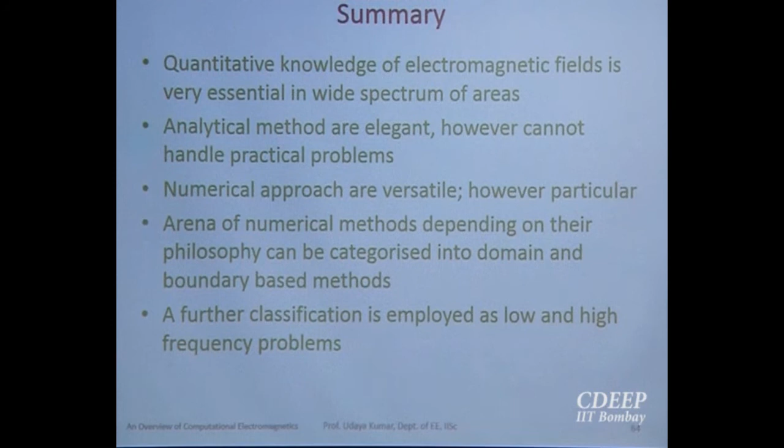So now I want to summarize some of the things and also comment, spend some time on this. Obviously we need to have quantitative knowledge on electromagnetic fields, otherwise we cannot do design, we cannot evaluate the health hazard, we cannot understand the physical forces involved. So there is a wide spectrum where I think everybody appreciates that.

Regarding analytical methods, they are very elegant, yes. However, they have limited capabilities built in, therefore we need to go for an alternative approach. Earlier we had analog methods where you try to simulate, scale the problem and do measurement. That's still a possibility, but scaling is possible only in certain classes of problems, and it is case specific, involving a lot of time, measurement error, and so on.

Therefore, the only way left to us was the numerical approach. But remember that it's only a particular solution for a particular dimension, particular material property, particular boundary condition.

Basic numerical methods can be categorized into domain-based methods and boundary-based methods. In the domain-based method, we try to approximate the governing equation. In the boundary-based method, we try to approximate the source itself and the polarization of the media.

Further classification is also possible, low frequency versus high frequency. Everything said and done, high frequency people, the EC counterparts, always have the pride that they are dealing with complex electrodynamics. It's not necessarily so. To give an example, if somebody wants to analyze the dielectric field, the first step would be to learn tensor analysis. Then I'm talking about electrostatics, because electrostatics is considered the least significant component of electrodynamics.

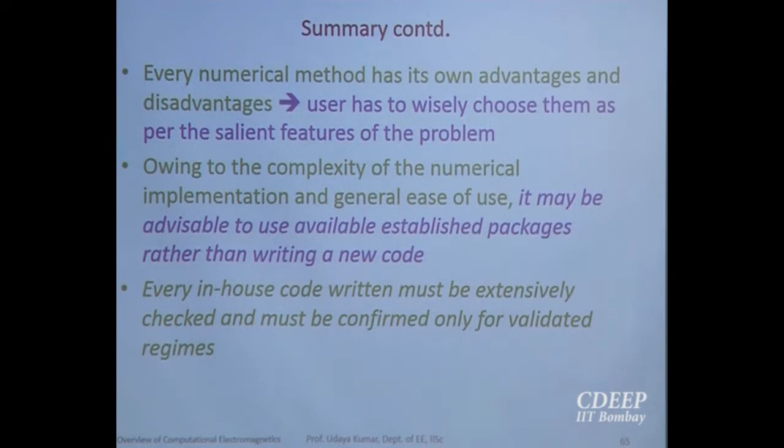Then this is one funny thing about packages. Because I advocated for packages, I should also caution here. For every input, the package will give a colorful output, but that doesn't mean the physical problem is actually modeled.

Then suddenly one senior person appeared at my door from a local college. He said, you mentioned that day that ANSYS has large capabilities. I tried modeling a point-plane geometry, and it doesn't give the right characteristics, it doesn't know how to model it. But the package cannot know anything, it is your responsibility to use the package properly. And point-plane geometry is a very trivial geometry to model in any package.

He doesn't know; many people confuse axial symmetry with axis symmetry. Another funny thing is that all these packages have beautiful GUIs, with interfaces and dropdowns for mechanical, electrical, and magnetic properties. The user assumes that, oh, it understood all the physical properties. But finally, when they select electrostatic analysis, whatever properties they entered in the mechanical and magnetic regime are never used further on, and they don't realize this. They think, I have given all the properties, so it must have understood.

This is one of the complications. Not to deviate, but once I had an interaction with a well-known company, which I have not mentioned.

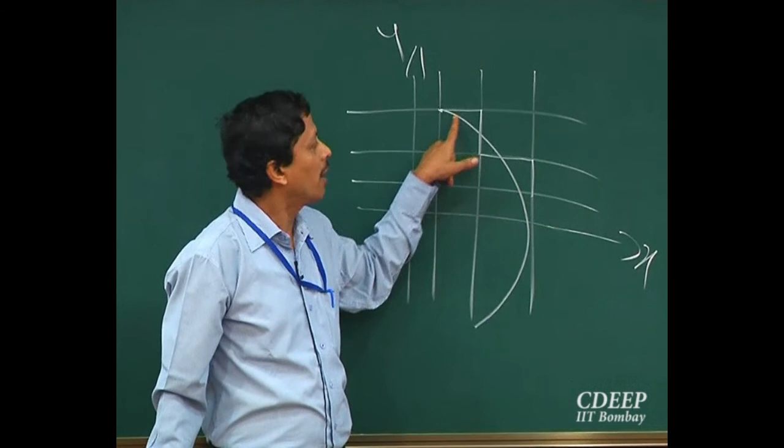Good morning sir, 1 minute - there is also another approximation in FDTD where, instead of doing this staircasing, if the material is different here, it's only for dielectric material, not for conducting, they give the average material property to that cell. That's also possible, but it's still a staircasing error.

So if an error message says that some PEC cells are found in staircase mode while designing in CST software, how to eliminate it? No, that is specific to your software, nothing to do with methodology, is it not? Okay, package specific - these are package specific problems. For example, Lorry - just to give an example, maybe examples are not good.

If you're in a Maruti car and go through first, second, third gear, it zooms up, whereas a lorry cannot, because that's the way the mechanism works. So you have to look into the package. It's difficult, not just about the methodology.

On certain points, those criticisms could be eliminated if instead of using the Taylor series expansion, you use a method where boundary problems, curved boundary issues, would be eliminated because the non-zero terms on the cross-diagonal get eliminated. I mentioned that, sir, but the second one I did not show. The integral approach can eliminate many of these errors.

Yes, that's the reason they end up using the finite volume method eventually. Yes, this is the process of doing things.

For finite elements, I'd prefer the variational approach, because with the functional, you don't have to solve the equation, you minimize the energy functional and get the solution. But for teaching in the classroom, the Galerkin method is more straightforward, because variational calculus itself is questionable in many places, with one more operator, delta, and dou by dou t. It's extremely difficult to teach in class. There are also problems where no variational approach is possible, because an energy function does not exist, so you artificially have to add terms to get it.